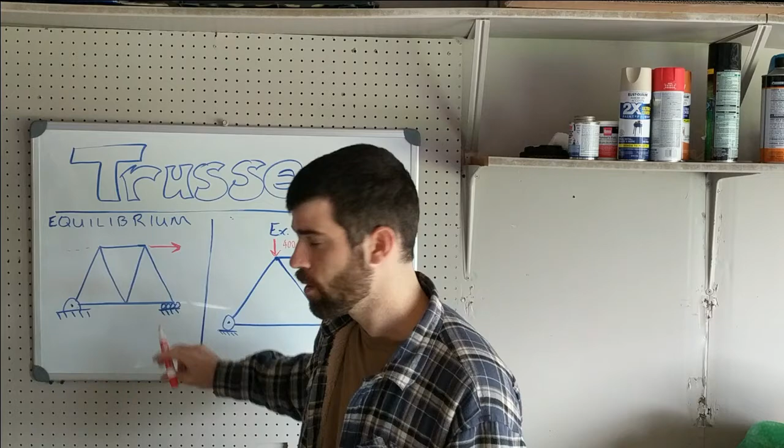And here at our little roller skate, we can only have support reactions vertically. So we know we're going to be able to solve for a little reaction here. And then we've introduced this vertical force that's going to have to get counteracted somewhere else. Well, where can we counteract it? Only right here. So we know that we're going to have this other vertical force at the pin joint.

Finally, there's this X component here - I mean, it's all X, this force. And that's going to have to get balanced out somewhere. So we're going to put that right here.

So in example 6.2, one of your solved ones worked out in the book, you see, even though they're not both on the ground like we'd normally have, we've got our pin joint that's going to have an X and a Y support component, probably, and then we've got our little egg-shaped roller that's going to have a vertical support component.

Okay, so now we've got dimensions. You've got 400 newtons acting 3 meters away trying to turn this counterclockwise. You've got 600 newtons acting 4 meters away trying to turn it counterclockwise. Those are working together, so we're going to need to work against that here at this support. So 400 times 3 is 1200. 600 times 4 is 2400. That's 3600. We've got to counteract it 6 meters away, so there's going to be 600 newtons acting up like this.

Okay, so now we have 600 newtons vertical, 400 newtons vertical the other way. What's left is 200 newtons this way. And then we've got 600 newtons this way. Nothing else happening in the X direction, so we know we're going to need 600 newtons here.

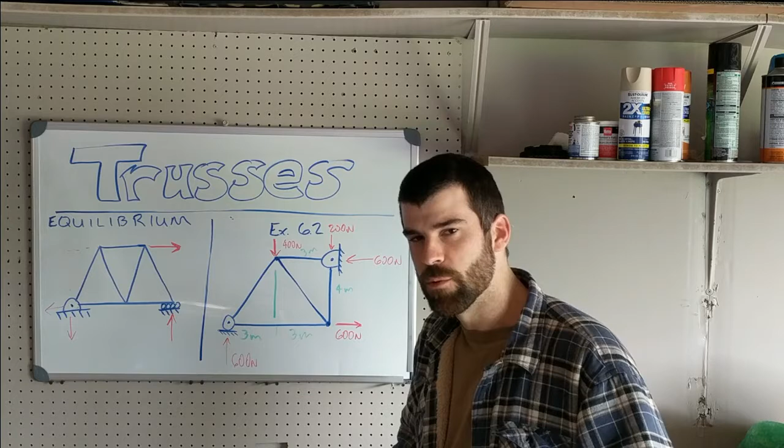So you can always find your support reactions before you go about solving. You don't always have to - we'll look at that in joint selection. But just know that with these truss problems, it's pretty much always going to look like this, where you have a pin with some kind of rotation, and then a little wheel.

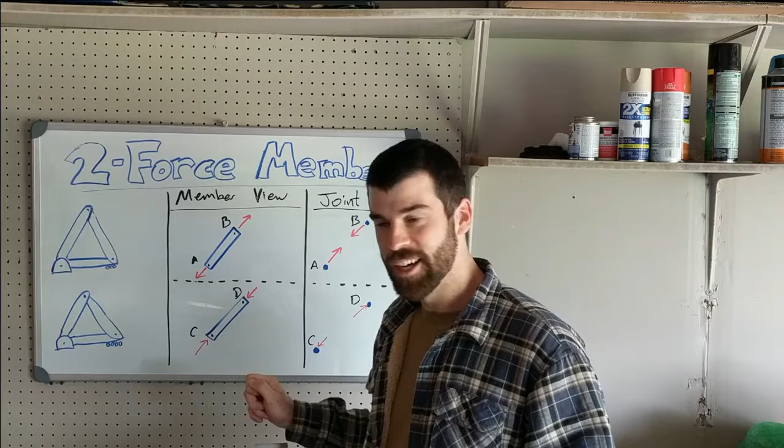Okay, so when we worry about trusses, we know they're always going to be two-force members. This makes our lives much simpler. What do we mean by a two-force member? Well, if you remember from last chapter, it's just going to be a member where you have only the force in the direction of the member. It's equal and opposite at both ends.

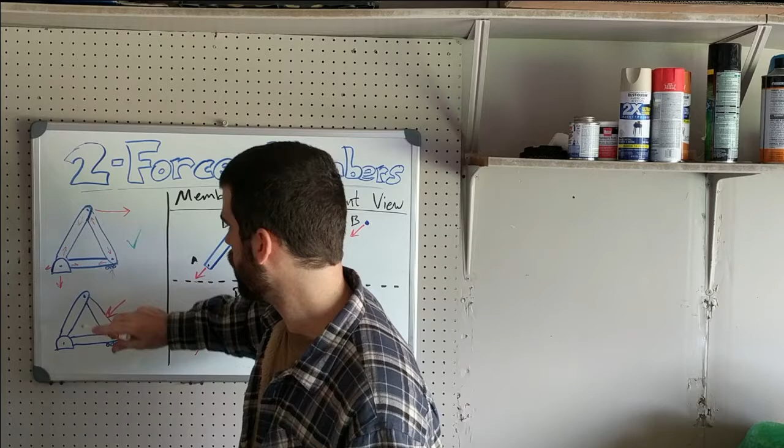Anyhow, what is not a two-force member is if we apply this load here in the middle. This is going to create some other kind of stuff that we're going to worry about when we get to frames. But this right here is not a two-force member because the load is not being applied to one of the joints. And this load doesn't have to be applied horizontally, we could have it be vertically, but it's got to be applied at the joint. So this is not a two-force member.

Okay, so these two-force members have two possibilities of what's going to happen in them, excluding zero force. I guess there's three. They could be in tension, they could be in compression, or they could be zero force.

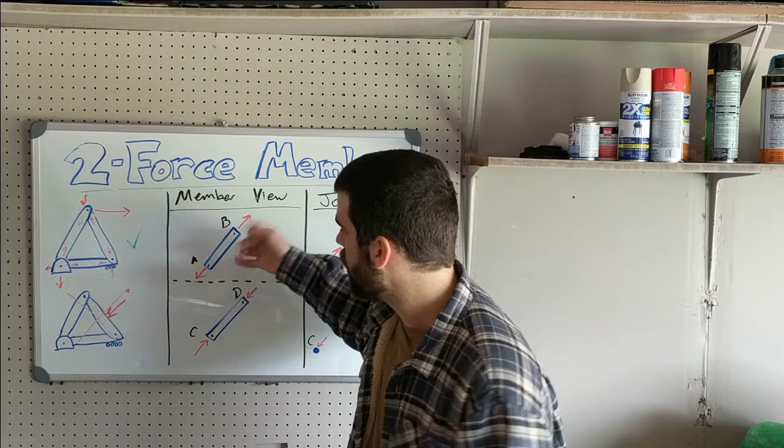So if a member is in tension, the bar is getting stretched out. And so from the member's view, tension is going to look like this. You've got these two forces, each pin is pulling it apart. But equivalently, so let's go.

Okay, so we have tension here. But if we look at the same thing from the joint's perspective, we're going to have the arrows facing the other way. That's Newton's third law, right? We've got each action has an equal and opposite reaction. So even though there's some confusion here sometimes, because you look at arrows like this, it looks like they're pointing in, and it looks like they're squeezing that bar, which makes you think compression sometimes. But don't ever think that. What's happening here is that the bar is pulling in, it's tugging in at each joint, and so this is also tension.

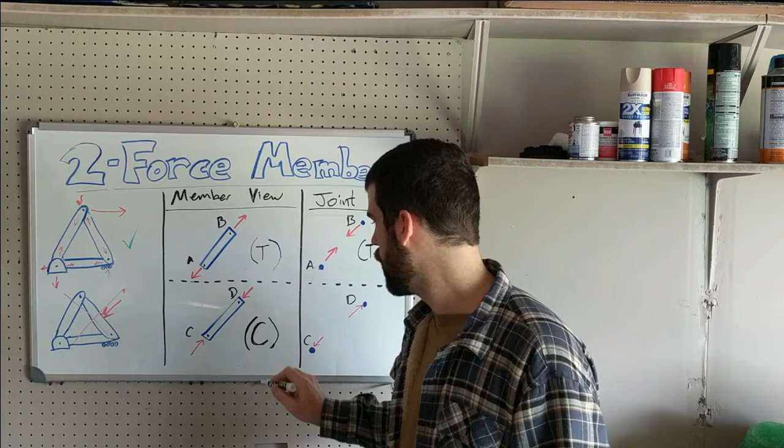Conversely, if I'm the bar, compression looks like it's squeezing in on me. So we write C for compression. It's terrible. And then if you look at it from the joint perspective, this is the bar pushing out on the joints, and so this is also compression. So just make sure that you're always aware when you're drawing free body diagrams and trying to analyze joints or members that you know which one you're looking at, which perspective you're looking from, because this will start to matter a whole lot when we get to free body diagrams of frames and machines and things like that.

Okay, like I was talking about previously, sometimes a two-force member is actually a zero-force member. So this happens in two different situations. One situation is when the two members connect at a joint that is subjected to no external loading. So one situation happens where you have a joint of just two of these two-force members, jointed at a pin joint, and it's subjected to no external forces or reaction forces. So it can't be at one of your roller skates or your pin joints.

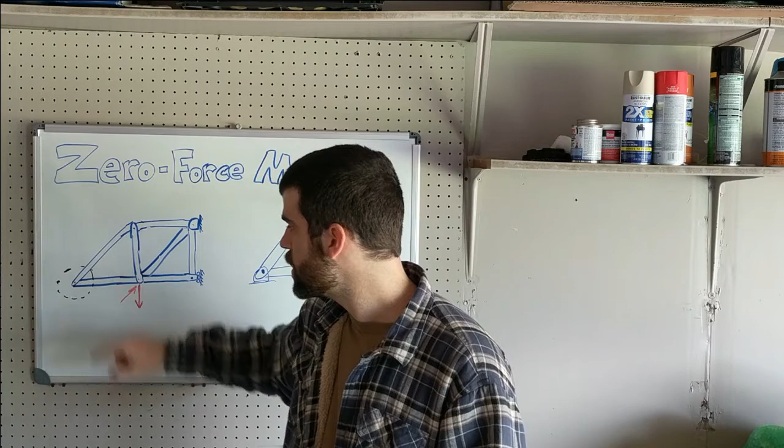It can't be acted on by an outside force. But you see that with this force happening here, this is being counteracted by these guys, and even if there's force being exerted kind of obliquely or whatever, this force is going to be compensated over here, because if there's no reaction force or external force happening over here, then there's really nothing that this joint could do to counteract some kind of a force developing in here. So this tells you that both of these are going to be zero force members, and that you can just basically forget about them when you're doing your problem.

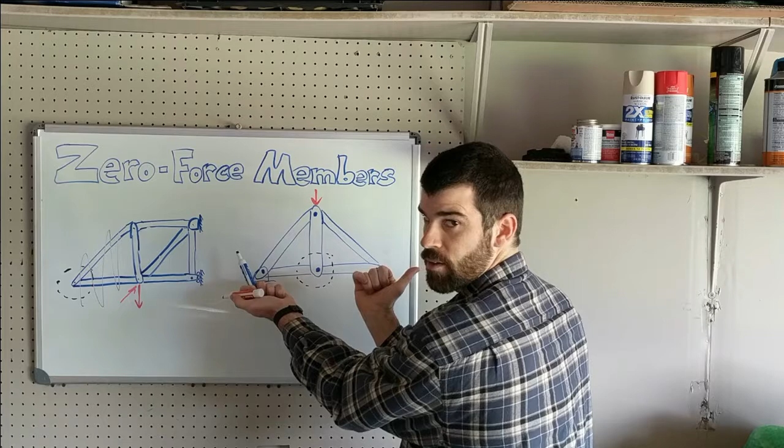Likewise, if you ever find a place where you have two members that are collinear, and then there's a third member joining that joint, then that third member is a prime candidate for a zero force member. This is confusing at first, because in this situation you have a force that appears to be applied directly into this middle member. However, if this member was to be counteracting this force, imagining these weren't there, it would have to be in compression to counteract that. So down here you'd need something to counteract that compression, and there's nothing here—no reaction, no external force. So all of the load from here is going into these guys, and subsequently these guys have equal and opposite reaction forces in this plane, leaving nothing for this member to do. So this is also going to be a zero force member.

Remember, however, if there's ever a load applied directly to it, all bets are off, and you have to analyze the forces in it now. This is now a load carrying member.

All right, method of joints. It's always nice to be able to find the zero force members before you solve, so that you don't end up overcomplicating things or trying to solve a harder problem than there actually is. In fact, in some cases they might make it so that you have to find these in order to solve the problem. But in this one, we're just worried about finding zero force members, and it's actually very easy to do.

So remember, we have two different ways to tell if there's a zero force member. The first one is that there will be only two members forming a truss joint, and there will be no external load or reaction support load on it.

So if we look at our diagram, there's E and A, both have two members forming truss joints. However, both of them are going to have support reaction forces. E is our little roller, A is our pin joint, and with external loads on the whole thing, we know that both of these are going to have some kind of external loads. So these are not going to have zero force members.

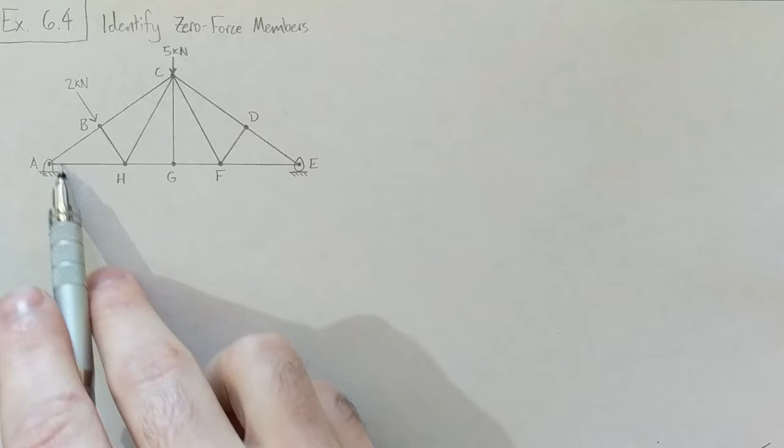The next way is where two of three members are collinear. Then the third is a zero force member if there's no external reaction force or external loading.

And so we have three places in this one figure where that is the case. We have joint D, where CD, DE are collinear, and DF is not, and we do not see any external loading on DF. So we know that DF is going to be a zero force member.

We also see this happening here at G, where HG, GF are collinear, GC is not. So GC is the one we're concerned about here, and there's no external load being applied at G.

Now this is one that'll confuse you—this force being directed straight into G here, and you just think there's no way that there's not some loading happening here. But then if you thought about this 5 kilonewton load running into this CG member here, then there would have to be something counteracting that in the Y direction, which we don't have. So we know that this segment GC, or CG—whatever, I'll call it GC—is going to be a zero force member as well.

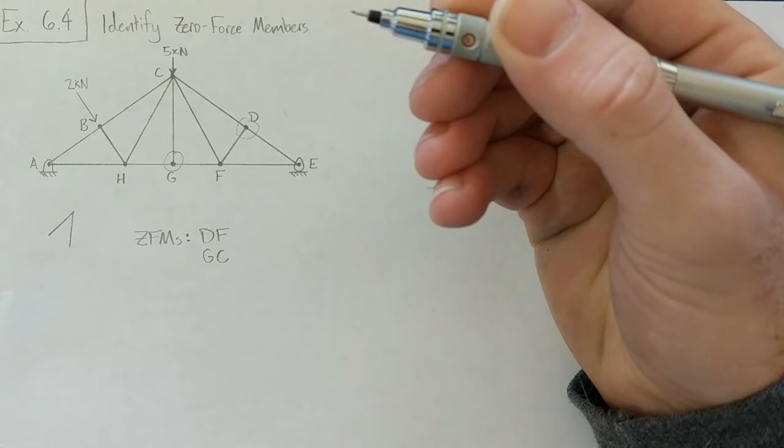Okay, so another obvious one is going to be B right here, where we have these two collinear and BH is not. However, you see that there is an external load being applied directly at B, so we know that BH is not a zero force member.

And now finally, the one that doesn't stand out quite as much, but still is the same, is right here at F. We have GF and FE are collinear. We already know that DF is a zero force member, and looking at FC here, this one's also going to have to be a zero force member. Similarly to G, we don't have anything being exerted at F. So even though we're not seeing this nice right angle setup like in our perfect examples, we still know that this is going to be a zero force member because we have no external loads being applied here at F. So CF is also going to be a zero force member.

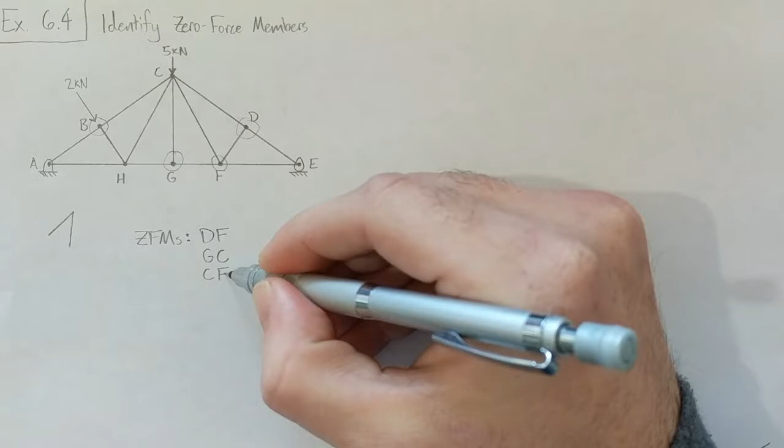And then these are the only three that we have. Looking here at F6-2, it just says which joint are you going to start with. So the order they prescribe is to first look for zero force members. Let's write it down as we go along: ZFM. So we only have one situation where you have a two-member joint, and that one does have an external load applied to it, so neither of these is going to be a zero force member.

And then we have one situation where we have two collinear members here, meaning that the third one is a candidate for being a zero force member. So what we do is we look at the joint C where the three meet, and we say, is there any support reaction or external load being applied at joint C? And there's not. Remember it doesn't matter that there's going to be a reaction force at A, we're interested in C here. And it tells us that because there's no external load here and these guys are collinear, then CA is going to be a zero force member.

So now we want to look and see about our knowns and unknowns in this problem. You might be tempted to jump right away into figuring out the support reactions at A and B, which is totally fine to do, and you'll probably end up wanting those if you're going to be solving for every member in the problem. But we don't actually have to in this situation, because if we look at D right here, we see that we have our one known, this 300-pound force being applied in the negative y direction, and then we have our two unknowns in DA and DC. So this is actually a valid place for us to start.

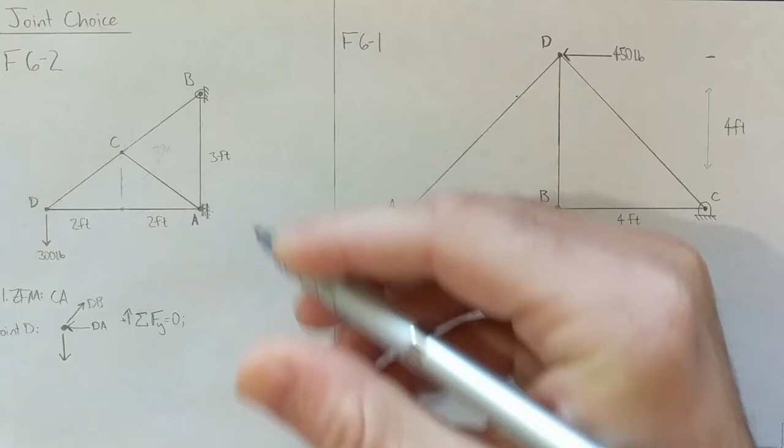So if we want to start solving here, we can look at the summation in the y direction equals 0. We know that this guy up here is going to be 5 feet, because it is a 3, 4, 5 triangle. So what we can do: 3/5 of FDC is 300 pounds, which means that FDC is 500 pounds, and that is going to be in tension, as we discussed.

And knowing that, we can use our summation in the x direction equals 0, and that's going to say that 4/5 of FDC minus FDA is going to equal 0. So we get that FDA is going to be 400 pounds, and that one is in compression, as we discussed. From there, the rest of the problem is the same stuff going at the joints.

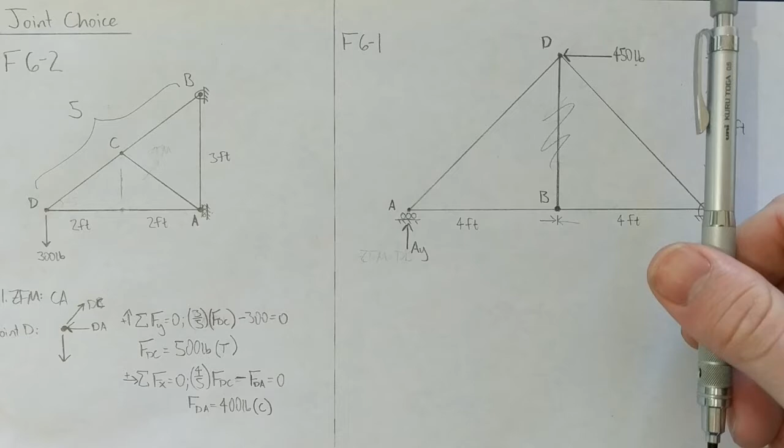Looking at support reactions now, we see that this 450 pound force is sort of tending to rotate this whole thing about C, right? And so that means that we're going to have a reaction force here called AY. And if we've got that, then that means we're going to have a reaction force down here called CY.

If we've got this guy here, it needs to be balanced out by this guy here, that's going to be CX. So we have a few choices here, but I think A is going to be the easiest to start at, because we'll know this AY in a sec, and then this AB is in the X direction, so we'll be able to directly solve for AD very easily.

First we have to find our support reaction, so this whole thing is tending this way, so we're going to balance out the moment about C. Summing in the counterclockwise direction, our moment about C is 0, and we have counterclockwise 450 pounds applied at 4 feet.

So we've got 450 times 4 feet plus AY times 8 feet—sorry, it's going to be minus AY times 8 feet—should equal 0. That gets us AY equal to 225 pounds.

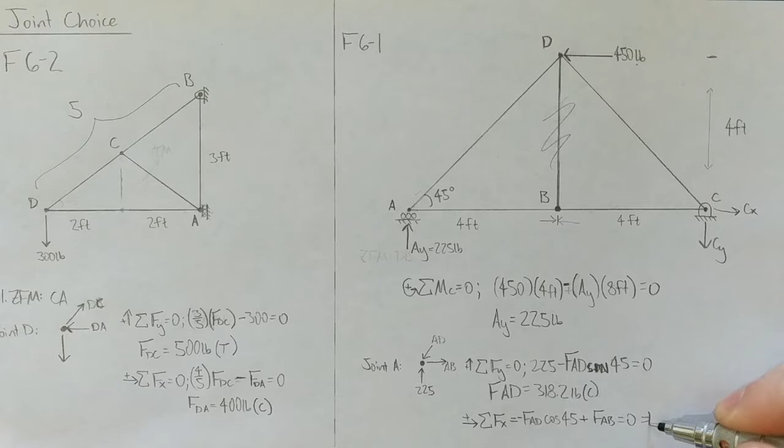Then in the x direction, we get FAD cosine 45, which turns out to be 225, minus because it's going that way, plus FAB, which is already in the x direction, equals 0. What we get from that is FAB equals 225 pounds in tension.

That's how we'd start this problem off. So we've got this compressive load here, meaning we've got that same kind of deal going on there. We know our tension here equals our tension here, equals our tension here, equals our tension here. CY has to get balanced out by CD. If you do that summation just like we did down here, you'll get that FCD equals 318.2 pounds, and it's in tension instead of the compression we saw in FAD.

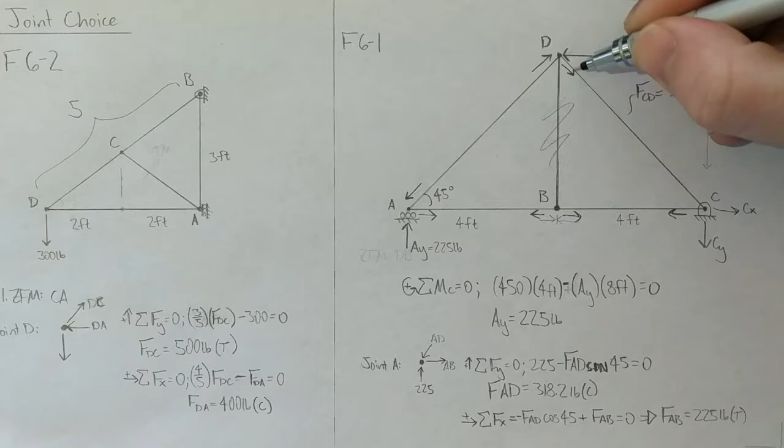Example 6-1, just about the easiest. My neighbor has a chicken—don't mind the chicken. I'm doing this out in my garage.

We have this very simple truss, 45, 45, 90, with a 500 Newton load being applied at joint B up here. Let's get to solving. First off, we look for any zero force members. Though these are all joints of only 2 members, this one has an external load, and these two have support reactions, so there won't be any zero force members.

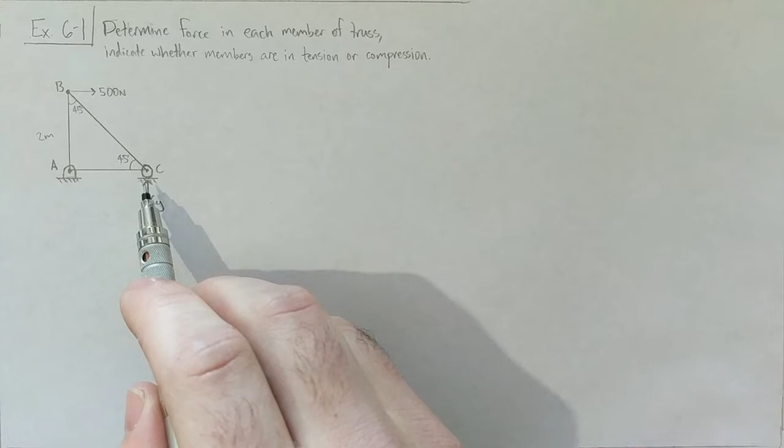So then we can go ahead and draw our free body diagram. We see that this 500 newtons at B is going to create a moment about A, so we'll need to counteract that moment here at C with CY, and that vertical load CY will have to be counteracted at A, giving us our AY. Finally, 500 newtons in the positive x direction needs to be counteracted by 500 newtons in the negative x direction, which we'll call AX.

So there's our free body diagram. I know I drew it over the original diagram, but I spent time with a ruler to make that, so I figure we'll use it.

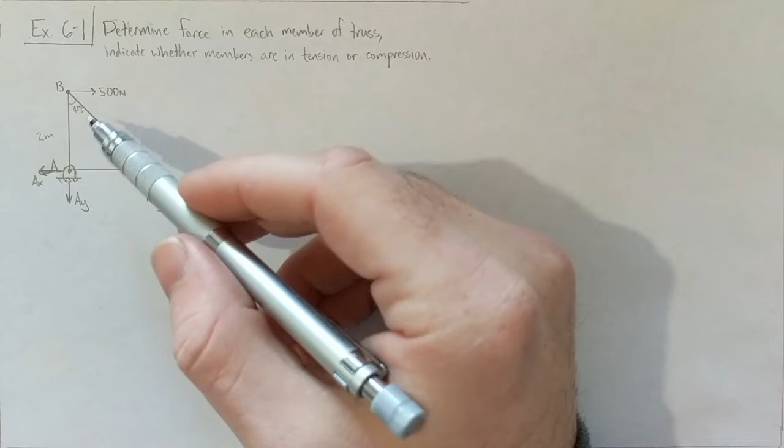All right, so now we want to get to solving, and we look at what we've got going on in the different joints, and we see that if we did go ahead and calculate AX, AY, and CY, then we could start really wherever we wanted. But let's go ahead and skip that, because we can see that at B we already have 1 known and 2 unknowns.

So we can just go ahead and get to solving. Let's draw joint B. We have 500 newtons being in the positive x direction. And then we can tell, because we only have one member of the three, one force here that would be able to counteract that x direction is going to be this BC member, because there's no x component to BA here. There's no x component, so we know that BC is going to be in this direction.

And that indicates compression. However, because it becomes very useful later on in more difficult problems to make assumptions and then see when the answer comes out whether it's positive or negative to support or deny or refute that assumption, we're going to go ahead and assume that this one is in tension. We're going to assume this is also in tension. And then just watch what happens here.

So this is our FBC, and this is our FBA. All right, so let's sum about joint B in the x direction. So we have 500 newtons, adding, because we're assuming this is in tension, so its x direction is that way. So we're adding this FBC times the cosine of 45, and that's going to equal 0.

Okay, and so when we do this, we get FBC equals negative 707.1 newtons. So because we assumed it was in tension and then we ended up with a negative for the answer, that means that we're going to reverse this, and we'll say, sorry, too many arrows, it might be confusing, we're going to say this is 707.1 newtons in compression.

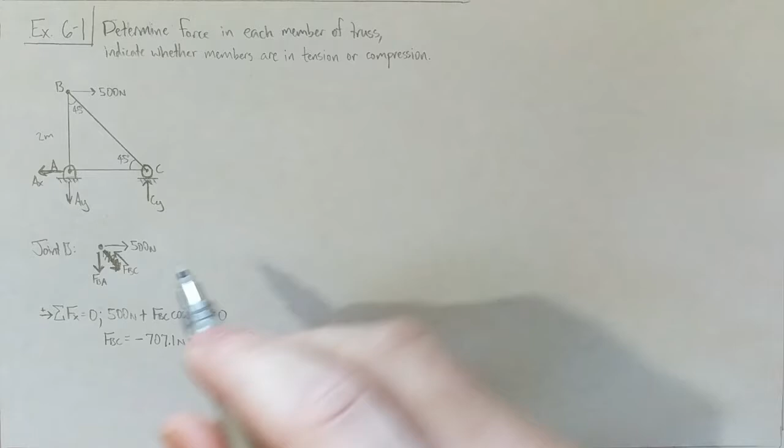Okay, and so now that we know that one's in compression, that does confirm that our FBA is going to be in tension, because the Y component of FBC is going to be in the vertical direction, the positive Y direction, meaning that the FBA is going to have to be in the negative Y direction. So let's go ahead and do that.

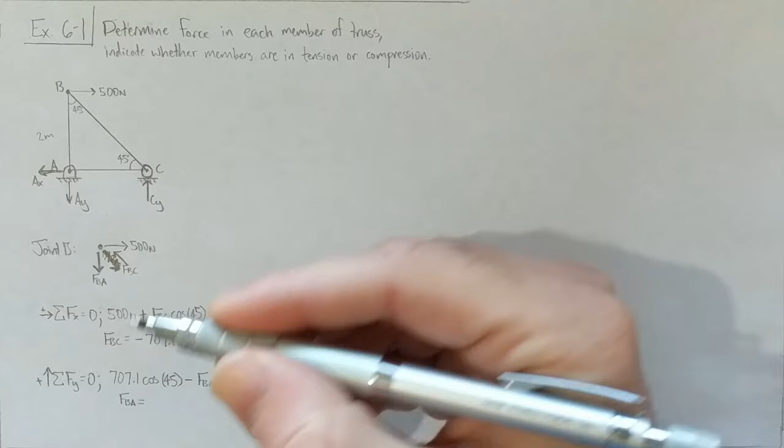Summing the positive FY, we get 707.1 times the cosine. I guess here, if you were looking at that 45, then it would have made more sense to use sine of 45, but again, since we're using 45 degrees here, it does not matter if we're using cosine or sine. So 707.1 cosine 45 minus that FBA equals 0. And what we get is that FBA is going to equal 500 newtons.

And that is in tension. All right, moving along. Let's go ahead and look at joint C now, because we know what this is, and so we've got, at this point, two knowns and... well, okay, so we don't know CY yet because we decided to skip the support reaction thing. But watch how easy this is going to be.

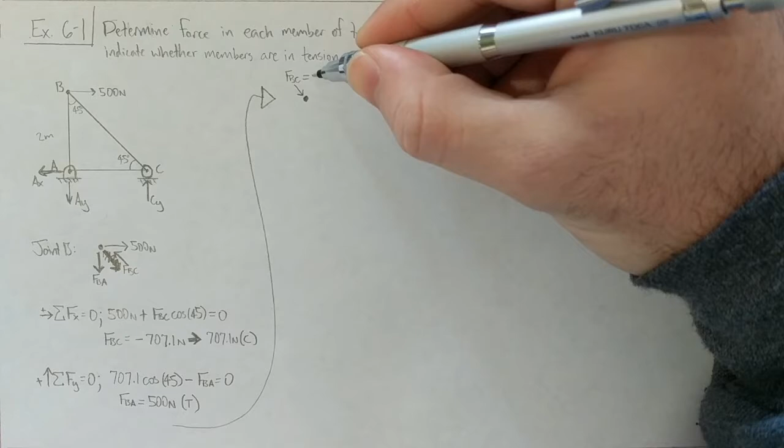So at joint C, we have FBC, which is 707.1, and we have CY. And so based on the direction of FBC here, we see that FCA is going to have to be in tension.

Exact same thing happens for summation at X. We get that 707.1, we'll say cosine this time, 45, minus FCA, it's going to equal 0. And then we get that FCA equals 500 newtons. And that will also be in tension.

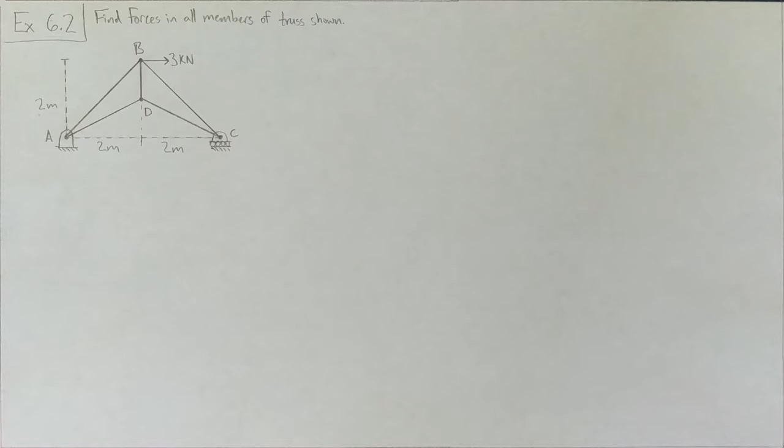Okay. So, all right, example 6.2. This is a pretty good one for practice, I think, because you've got to do some concurrent solving and whatnot. And it's also just kind of a funky looking truss, not quite as easy to figure out what to do right off the bat. But anyway, we're going to do that.

So looking at it, we don't see any zero force members, and we also see that we are going to need to find the support reactions before we get on to solving any further. So we see that that 3 kilonewton load is going to be causing a moment about A, that the roller joint, support roller—what do they call this—little roller skate on C is going to be counteracting with a moment, I mean a force that looks like this, that will be giving the moment that counteracts this moment.

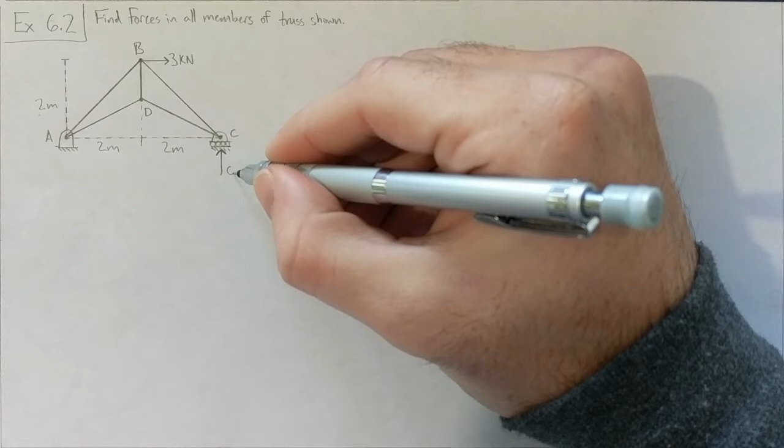So that's going to be CY. And in order to oppose CY, we're going to need an AY like that. And to oppose the 3 kilonewtons, we're going to need an AX like that. Okay, so let's figure out what those support reactions are equal to.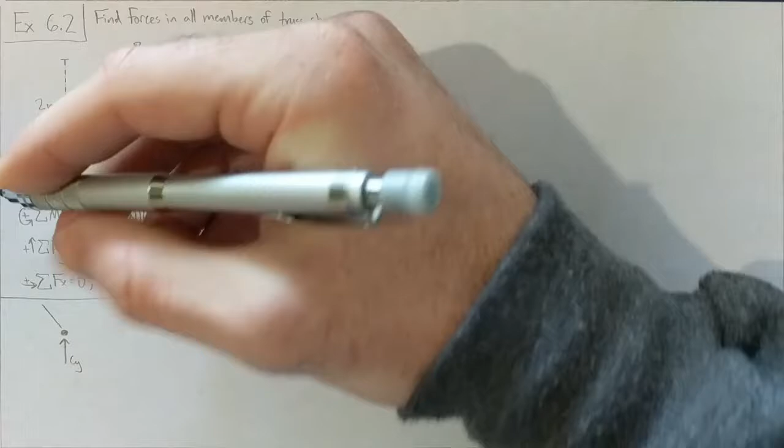So what we have at joint C is this CY, and we've got FBC coming in at 45 degrees. This is FBC. We're just going to go ahead and draw them in tension for now, making that assumption like the book says to do. And here's CD, FCD.

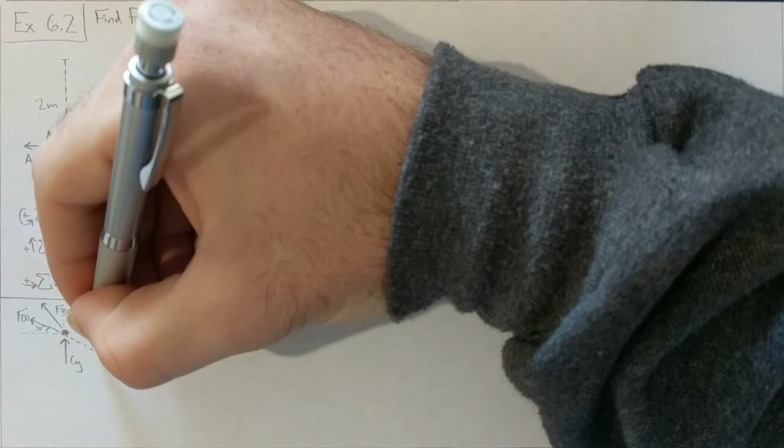Our original x-axis looked like this, where FCD was off it by 30 degrees and FBC was off it by 45. So if this was 30 degrees, we're going to make FCD our new x-axis. So this was x, now this is going to be x prime, and perpendicular to x prime, we have y prime.

All right, so now we have to make sure we understand the components of each of these things in our new x prime, y prime configuration. FCD is directed along the x prime axis. FBC, the angle between CD and BC, is 15 degrees. And between CY and BC, this is that 30 degrees that we shifted everything.

So the reason we moved into this new coordinate system is so that FCD disappears when we sum about the y prime axis. Let's go ahead and do that. Summation about y prime is going to equal 0.

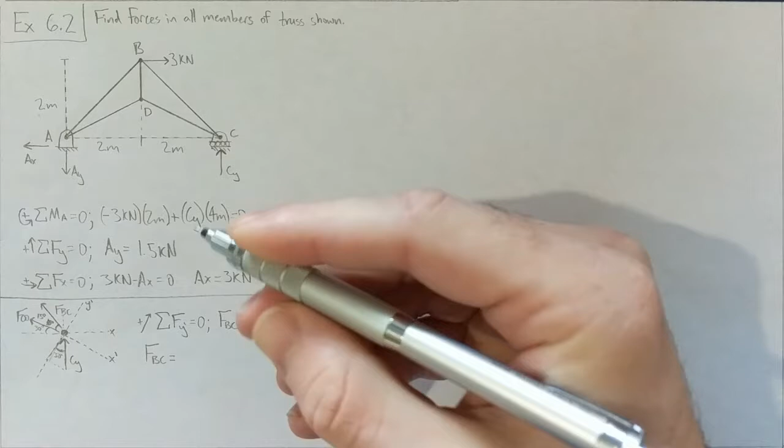We know CY equals 1.5 kilonewtons. And so what that gets us is that FBC equals negative 5.02 kilonewtons. Because we got that negative and we were assuming it's in tension, that means FBC is positive 5.02 kilonewtons in compression.

And then now we can do the summation of the x-axis, so the x prime axis, I should say.

And you know, this is where it's kind of nice to do your little arrows before your summation symbols, just to remind yourself what's going on.

Sum of f x prime is going to be minus FCD plus the sine component of this, which is going to be cy sine 30, which equals 0. cy was 1.5k again. And that gets us that FCD is equal to 4.1 kilonewtons.

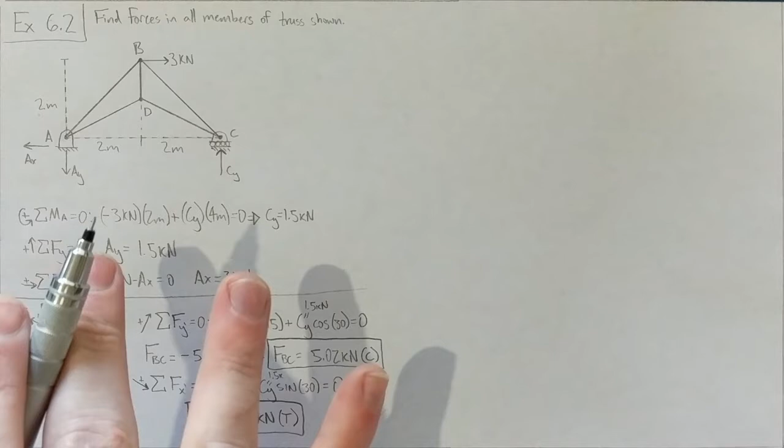Okay, so we did this change of coordinates in order to be able to solve directly instead of solving equations simultaneously. It's not too hard to solve a simultaneous system of two equations, but I'm going to use this opportunity to demonstrate doing that with one of your trusty TI calculators, because I think this is something that's going to be very beneficial to those of you that don't already do this. I think you can save a lot of time on tests where you can just enter in the equations and get your answers instead of having to think at all about how you want to do your elimination or substitution. So even though this is probably a pretty trivial example, I think it's a good skill. So you can skip ahead if you're not interested in this part.

But basically, a system of equations, when you write it in, well, let's develop our equations first real quick. All right, so we are just using the regular x and y axes this time, not the changed coordinates that we did last time.

Okay, so whenever we solve a system of equations as a matrix, a linear system of equations, I should say, we set these things up as Ax equals b, and then the solution can be calculated if you just do A inverse times b equals x.

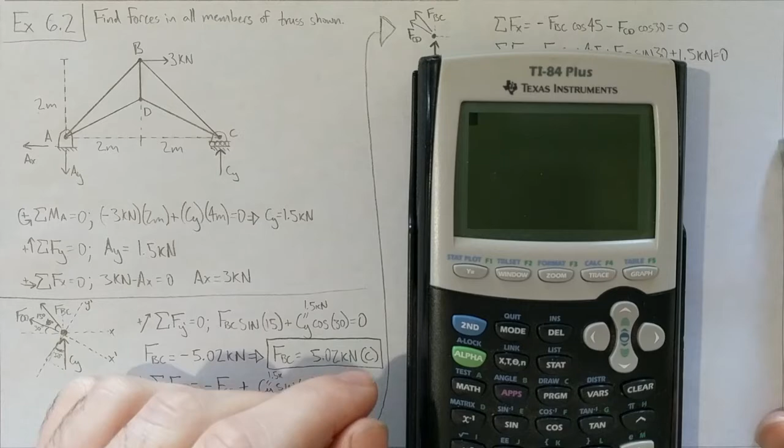So, getting at your trusty TI-84 Plus, oh man, living large here. We go second, matrix, edit, it's a 2 by 2, right on. Get minus cosine 45, minus cosine 30. We've got sine of 45, and we've got sine of 30. Right on. Okay, now we're going to edit this one, and we got 0. This is our b. 0 and minus 1.5. Well, let's just go ahead and write 1500. No, let's keep it in kilo.

All right, cool. So now what we do is we just go matrix A, okay? What we're doing right now is this, by the way: A inverse B. Look at that. So, move that there. So our A inverse times B equals X, which equals minus...

Minus 5.02 and 4.1. Okay. And this was X, which is equivalent to our FBC and our FCD.

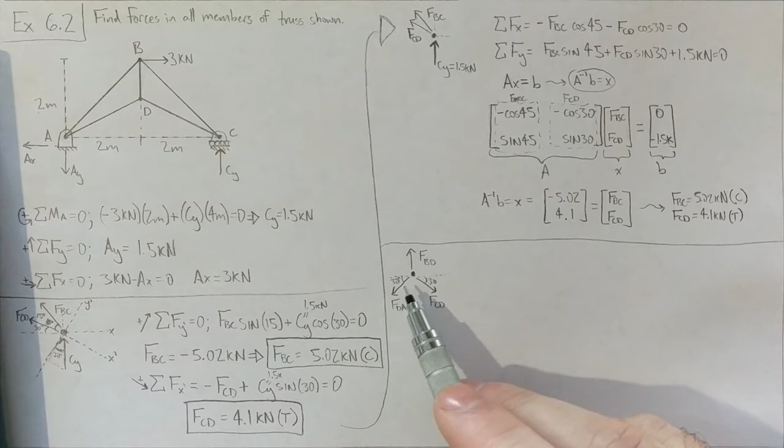Now let's take a look at joint D. All right, so you can see I've already drawn the directions of all of them. And that's because this particular joint, you can actually be a little clever with this one. So for FDA and FCD, it's pretty apparent that they're going to have to be their X components. They're symmetrical about the y-axis, so they're just going to be equal and opposite.

But what you can realize about this whole thing is that you've got 120 degrees between every single pair of these. So we can see by the radial symmetry here how these are all going to have to be the same tensile force. So FDA is equal to FBD is equal to FCD.

And those are all equal to 4.1 kilonewtons in compression... in tension. We can turn that into a T, can't we? Kind of looks a little towy. All right, that's good.

Okay, and then we'll get one more before we go, which is to figure out what this force AB is going to be. We'll go ahead and take a look at, it doesn't matter if we do it at A or at B. Let's just look at A because we've only got, well, let's look at B. Let's look at B, I like that. All right, so let's see. We'll just assume tension like we normally do when we're assuming.

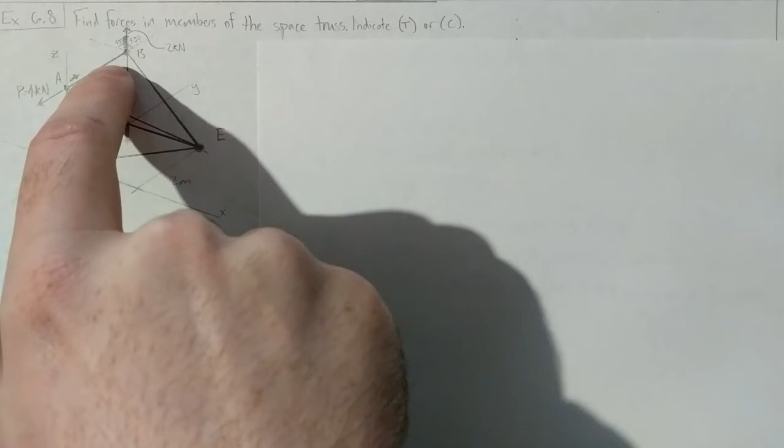I went ahead and already got the unit vectors for AE, BE, and CE because those are the only ones that aren't simply along one of the coordinate axes that's already defined. So like CD, that's just going to be multiplied by the J unit vector, and AC is just multiplied by the K unit vector, whereas these are going to have to be multiplied by a few because they're Cartesian vectors now because we're in 3D.

All right, so we're going to start at A - and forget about that little arrow there. We're going to start at A because we have 1 known and 3 unknowns. And in 3D space trusses here, we can do that. So we're just going to write out the vector notation for each of these unknown forces. So FAB is FAB in the J direction. FAC is FAC in the K direction. FAE is FAE in this 0.577 yada yada direction. And then P is this minus 4 kilonewtons in the J direction.

Okay, so we're just going to go ahead and sum up forces equal to zero. It will kind of end up making a system, but the way this problem is set up, and the way that space truss problems are generally going to be set up, it'll just kind of reveal things as it goes along.

Fx is going to be this 0.577 that you get for this FAE I component, and nothing else. So that tells us that the entire vector FAE is going to be equal to 0, because it's saying the whole FAE times 0.577 is equal to 0. So we know that FAE, this long guy, is going to be a zero force member. I'll actually box that.

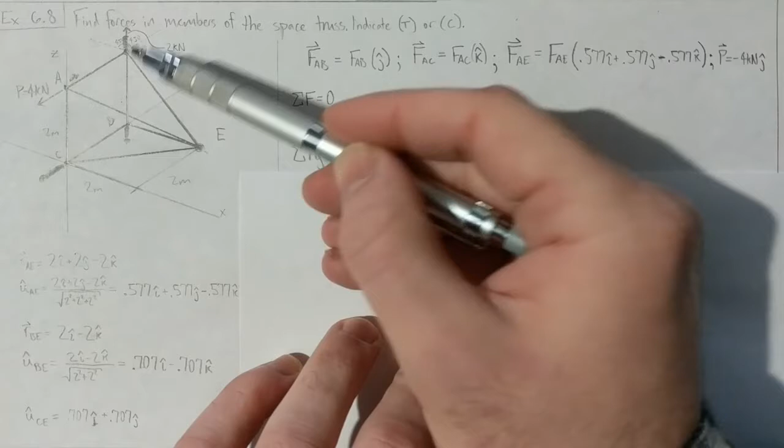And so it's 4 kilonewtons in the positive J direction, but unlike we were doing in previous units, we're not just going to say positive 4 kilonewtons, we have to say it's 4 kilonewtons in tension, because when we get over to B, that's going to be in the negative j direction. So don't get confused based on what we've done in previous units.

You still have to consider each of these as a two-force member, and each of them is going to have either tension or compression, which will be positive for one end and negative for the other end.

All right, and then for FZ, we have FAC minus the Z component of FAE. We still have FAE equal to 0, so our FAC is also going to be 0. So this is a zero force member here, this is a zero force member here.

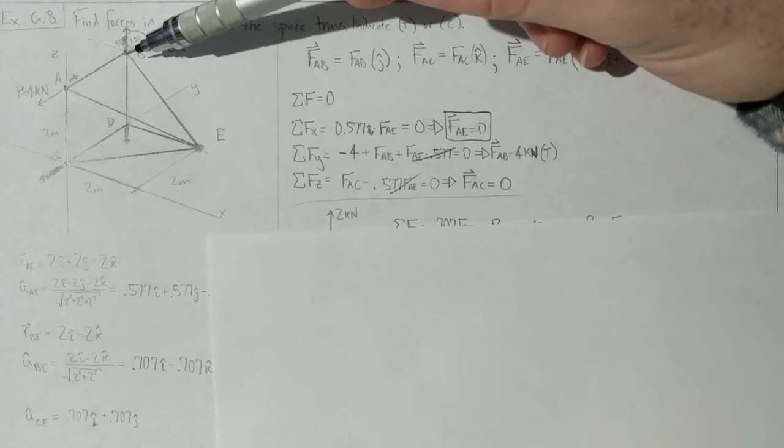All right, so now we can move along. Let's go ahead and take a look at what's going on with B. So we have that 2 kilonewton in the positive Z direction. We have our known force AB, and then we have unknowns for BE, BD, and the support reaction, which we're going to call RB. Okay, so here's a drawing of it, kind of crude, but this is RB back here, BE, BD, 4K, and 2K.

So I'm just assuming here that the BD force is going to be in tension, just like we've done when we don't know for sure. Looks like it might be. Same with FBE. So we're just going to roll with that and see what happens.

All right, so we have this 0.707 FBE minus our RB cosine 45 is 0. So we know that RB and FBE are going to be the same magnitude.

We have FY, some more going on. So we have our RB in there, sine 45, and then we have 4 kilonewtons from our FAB that we know. So that helps us figure out what RB is, which is 5.66 kilonewtons, and we learned from here that that was going to be equal to FBE. So signs came out positive, sorry about that. 5.66 is kind of ugly, but we get that FBE is 5.66 kilonewtons in tension.

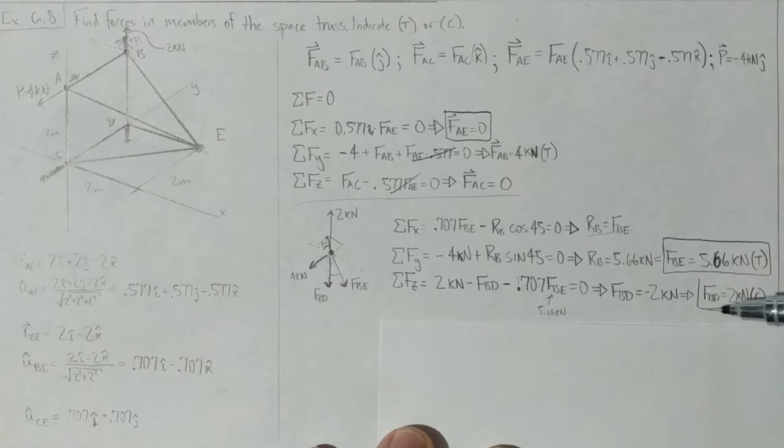And so that told us that our assumption about tension was incorrect. So we're going to write FBD is equal to 2 kilonewtons in compression. All right, so now we're back to where I left off last time. We can keep on chugging.

And let's take a look at joint D. So we have BD, which is in the vertical direction, and we know that it's 2 kilonewtons, and we also know that we have this directional support here that can only support in that positive Z direction. So we know that BD is just going to be reacted by this. CD has nothing that it's going to react with, so CD looks to be a zero force member.

Here, I'll just write sum of forces. So CD, recall we had some other zero force members as well. We had, sorry, this is FCD, okay, zero force member. We had FAE, also a zero force member. FAC was also a zero force member.

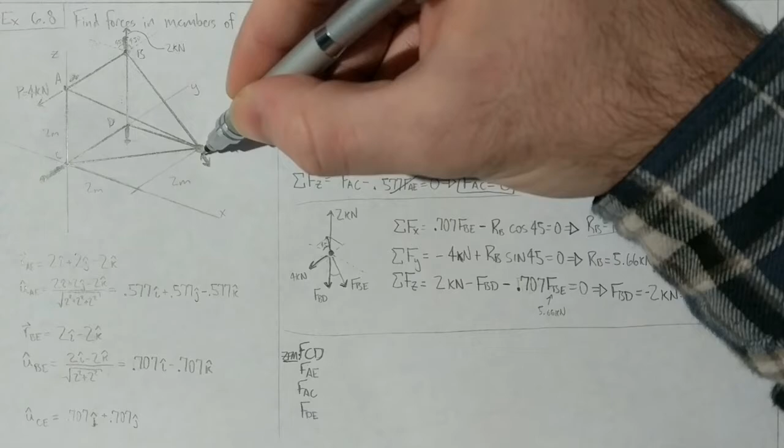So this is where it gets a little tricky, you start to think, okay, FBE actually had tension going on in it. So you're thinking DE should have to have some tension, but since E is that welded joint, E can have a support reaction that's counteracting that tension, and then the rest of these three can be zero force members, and they are.

So yeah, finally FCE, we had this was a zero force, this was a zero force, and there's nothing different about this. It's another zero force member.

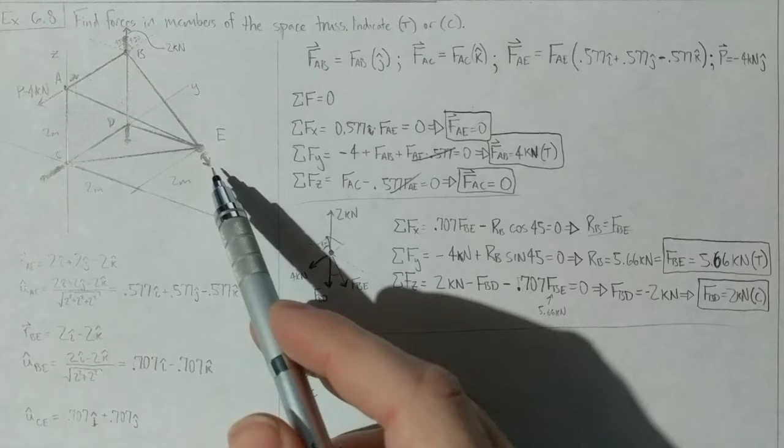And so you're done, and it turns out that the only three members that carried any of the tension in this problem were FAB, FBE, and FDB.

Okay, so in the method of sections, what we want to do is solve for less than all of the different components, which in a small situation like this, if you were building a footbridge for the park or even a train bridge with only a few members, doesn't make a whole lot of sense, but in engineering sometimes we deal with much bigger, more complicated problems, and it helps to separate them out into little blocks.

You see this in circuits when people have an equivalent resistance, so that some team can work on one block of things and just pass on the input and output to the next team, and they can learn stuff. So maybe you want the person who has to source the material for the bolts to get the kind of information they need. You might just section off some part of the project or something. I don't know, it's enough justification.

In this class, what they're going to do is ask for a few different members of a bigger truss that are all arranged in a way that makes you think, oh, I should maybe just cut this and use the method of sections. And that's what we're going to do here.

So we want FGE, FGC, and FBC of this truss, for which we've already found some support reactions. We didn't find this support reaction, but we don't even need to, because we're going to cut it off here, and we're going to just look at this left side.

So that's what we have down here. And so these dotted lines are the other side of our cut for the three different unknown forces that we want to try and figure out. So what you end up doing in the method of sections is leveraging usually moment, by finding places like C and G here where two of your unknowns intersect an axis of rotation so that you can solve for whatever the third one is.

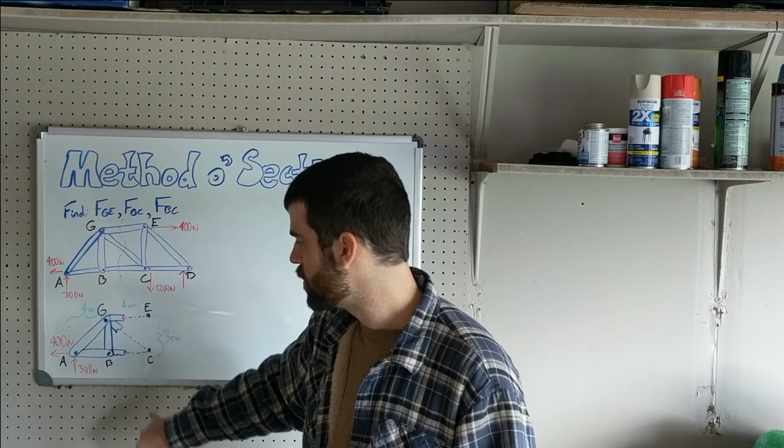So let's look at the moment about G. We'll sum counterclockwise per usual, so it's going to equal 0. That's going to be, we have a clockwise moment from both of the reaction forces, so it's going to be minus 400 times 3, minus 300 times 4, plus our BC. We're adding it because we know it's going to have to go counterclockwise to counteract these support reactions. So that's BC times our 3.

FBC times 3 equals 0, and what we get is that FBC is 800 newtons. And like we were saying, BC is going to cause a counterclockwise moment, so it's going to be directed like so, which is tension. It's 800 newtons in tension.

Okay, so now we can do the same exact thing here at joint C, where GC and BC are going to be eliminated, and so we'll be able to solve for GE.

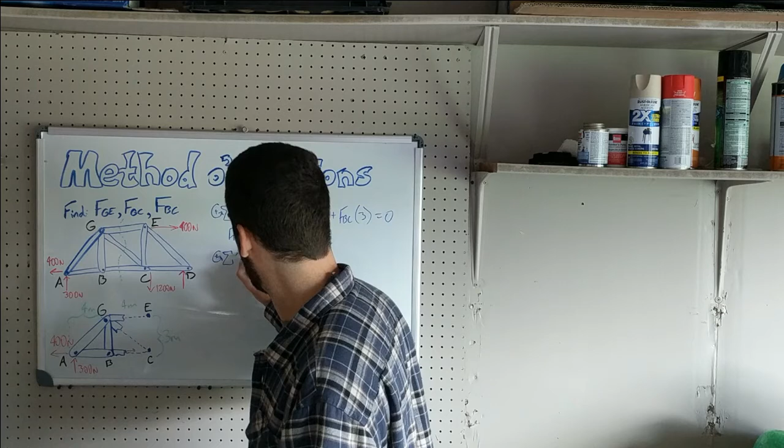Okay, and so we have our 400 Newton force goes through the line of action, through the axis, the point, so that's not going to contribute. So all we have is this 300 newtons, that's 4 plus 4 meters away from C. So we have, and that's also going to be counterclockwise, so this is going to be minus 300 times 8.

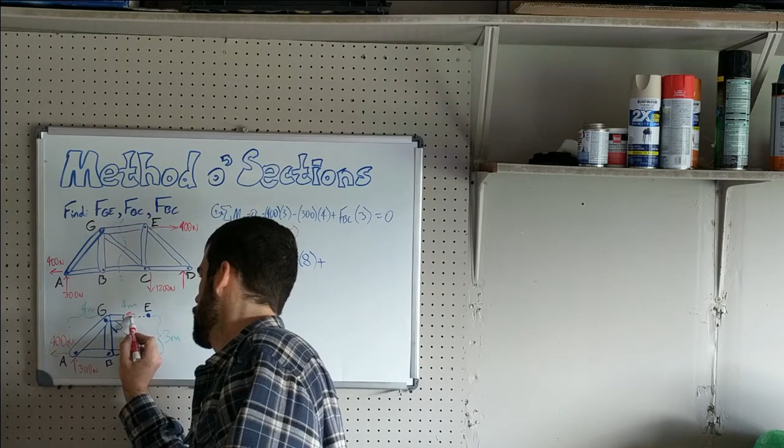Plus our GE, which is going to be causing a counterclockwise rotation, so it's going to be directed that way. Go ahead and draw our arrow for it. Yeah, so that looks like compression to me.

So that's plus FGE times 3 equals 0. So FGE is 2400 over 3, also 800. FGE equals 800 newtons in compression this time.

Alright, so FGE, since it has components in both the horizontal and vertical directions, we could sum it in the X or the Y if we wanted. Let's go ahead and use the Y, so summing in the Y.

0, and all we have is 300 newtons minus, this is a 3, 4, 5 triangle, and we want the 3 leg of it, so 3/5 times FGC equals 0, so FGC is 500 newtons.

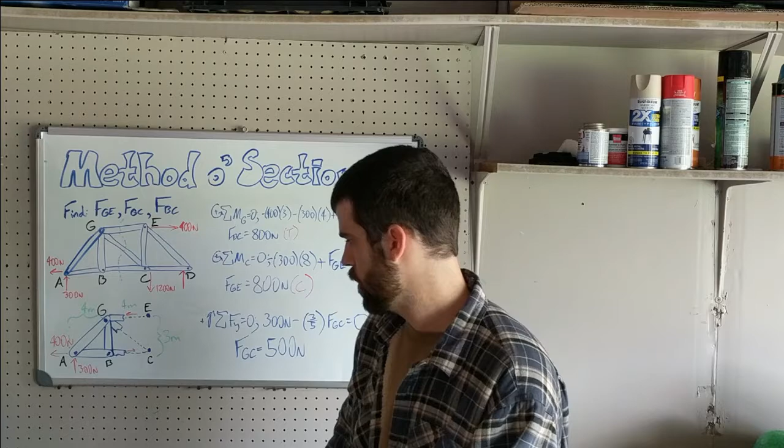And because it has to counteract this positive vertical force with a negative one, we know that that's going to be facing this way, which looks like tension. And that's the method of sections.

Alright, so here's a method of sections problem that's a little bit more complicated than some of the other ones. But it's a good example of a way that you can be clever and do a lot less work than it seems like the problem entails from the question. So the question we're asked is to find FCF. So that's all we want to get, is only this force right in here.

And so knowing what we normally do with our method of sections, we're going to want to cut along here and then use the section that has fewer forces going on. But first, before we can section that off, we're going to need to solve for whatever unknowns for the reaction force here. So all we need to do then is to sum the moment about A to get that reaction force, because the other reaction forces are going to happen at A, and we don't care about A because we're going to take this right side of the problem. So all we got to do is sum the moment about A.

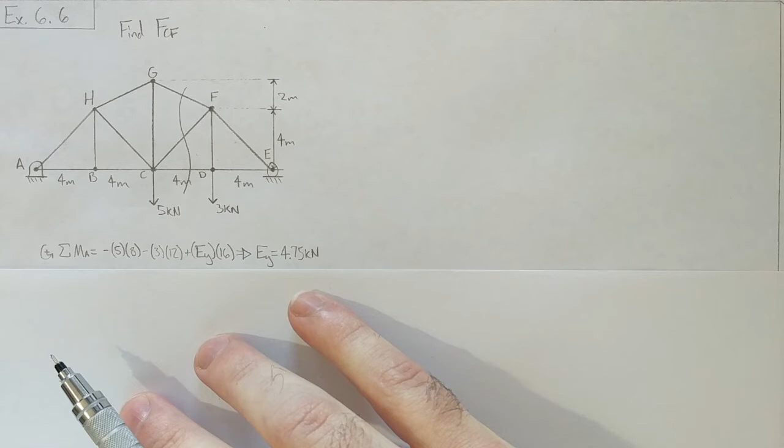We've got our minus 5 kilonewtons, that's 8 meters away. We've got our minus 3 kilonewtons, that's 12 meters away, plus our reaction force EY, that's 16 meters away. That comes out to being a positive vertical force of EY equals 4.75 kilonewtons.

Okay, so now we'll section it off. We'll make our cut. And so you can see we have just this 4.75 kilonewtons, this 3 kilonewtons, and then we've got our 3 components. This is the one we're interested in right here, CF.

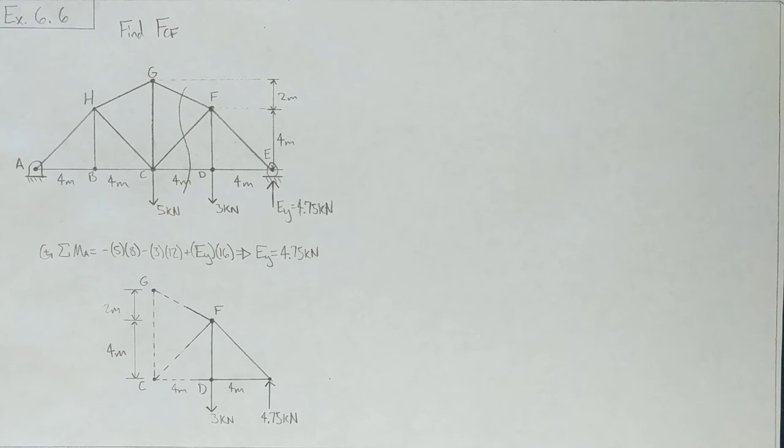And so normally what we would want to do here when we have our little square trusses is that we look for the places where, like C, right, we'd be able to get GF here because CF and CD both intersect here. So if we summed our moment about C, then we could try to do our GF thing. But we can actually go straight to CF, even though it doesn't look quite as obvious here, by extending out this line GF and finding where it intersects with CD, and then summing the moment about wherever that point ends up being.

We're given enough geometry to figure that out, because we see that this up here is a little 2 by 4 triangle, right? And so in order to get another 4 meters down, we're going to have to go down another 2, over another 4, down another 2. So we go down 2, over 4, down 2, over 4, down 2, and over 4 more. And this is going to be point... let's just call it N. It's a new point. No, let's not call it N, that means newtons. Fine, we'll call it O like the book.

Okay, so I'm just going to go ahead and draw that so that it's easier to visualize. Okay, so you see now we've got this big line of action for GO, or this big intersection of CD going all the way through to O, and GF going all the way through to O.

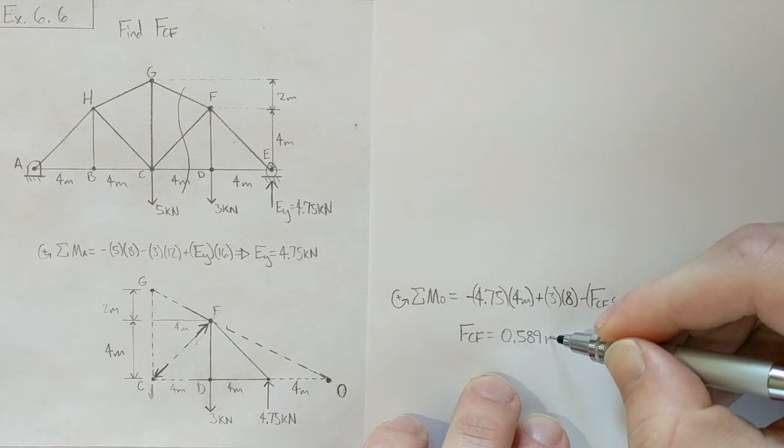So FCF, sine 45, applied 12 meters away, and that's going to equal 0. And what we get is that FCF equals 0.589 kilonewtons, and that's compressive, and we're done with the problem.

So this is a great example of how method of sections is really useful to do a lot less work. If you're in a crunch for time on a test and you're able to be clever about the way that you section it off, and this moment summing and moving CF down to here, you realize that you can boil it down to basically just two little equations instead of 12 or something.

Alright, so finally we're looking at frames and machines, and this is kind of going to be bringing in stuff that we've done in the previous chapters and sort of meshing it with the things that we've learned about trusses so far. So really the name of the game when it comes to frames and machines is free body diagrams, and then more free body diagrams, and then after that you would do some free body diagrams.

So what happens in a lot of cases, and we'll see this in some of the problems we're going to work on, the ping pong table, you'll need to analyze different parts of a problem from different members' perspectives. Say like you have pulleys on a bar, you might want to look at the bar, you might want to look at the pulleys, and always keeping in mind Newton's third law, that there's these equal and opposite reactions, and that's going to help you get through it.

Second point, example 6.9 is awful. I hate it, don't do it. Maybe look at it a little bit and see why maybe I hate it, but I think that the directions of the support reactions in it are just more confusing than anything else, and if they wanted to give an example like that, they should have put some numbers in it so that it would make a little bit more sense why the different ones are faced that way. Maybe I'll make like a 6.9 vengeance video or something, but I've got a different example similar to that I think would be a much more illuminating thing to look at.

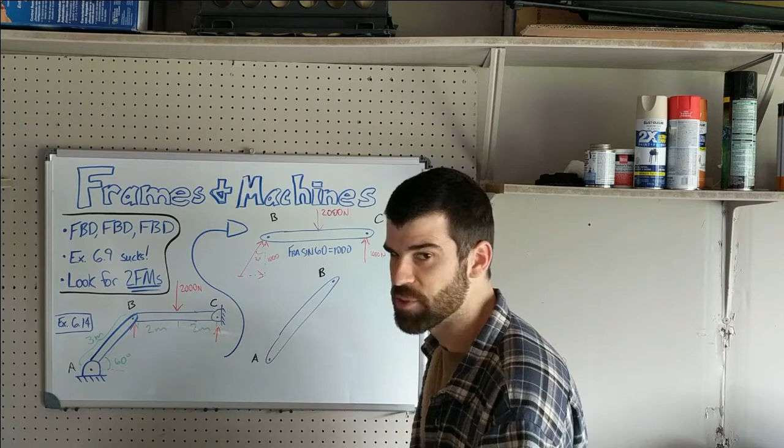And then that means this is a 30, 60, 90 triangle, I think. Yeah. All right, so basically this FBA... where do I write it? FBA is going to equal... that is 1,000 newtons, not 100. Sorry. Okay, FBA cosine 30, or FBA sine 60, whatever you want to say. We'll say FBA sine 60 is going to equal 1,000. And that gets you FBA is something like 1,150 something or other.

And then you're basically done, because now this X component is going to have a reaction here. So this is CY, CX, and here, if FBA is pushing on this, that means FBA is pushing on either side of it, so it is in compression, because those are pressing in on it. From the other side of things, this FBA right here is going to be equal and opposite, and you'll end up with your components here being your AX and your AY.

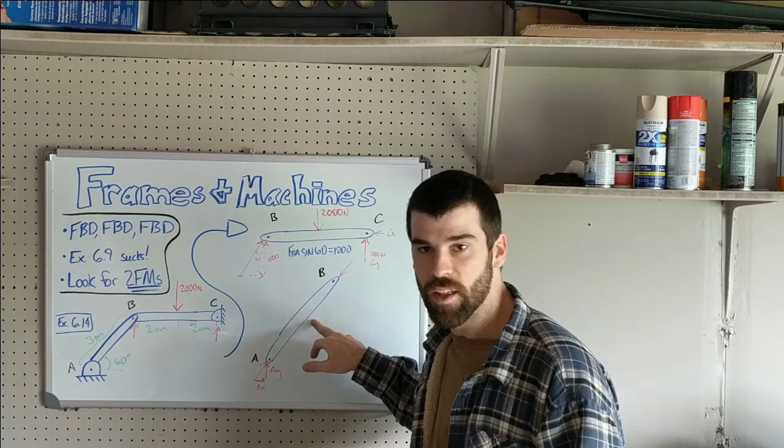So you can see how breaking it up and doing these multiple free body diagrams is going to illuminate the path forward, especially since you found the two-force member here, which simplified a lot of things. They show you in the book how it's several equations longer if you don't notice that this is a two-force member. So always look out for those. Don't trip about example 6.9, and we'll go work some more problems on the table.

All right, one final note that'll help you with your frames and machines part is that there's going to be a lot of pulley problems, and they tend to make things look pretty complicated with ropes serpentine through the problem, but really they're not so bad at all.

The main thing is that in a given rope, there's only going to be one tension, one tensile force. If they hang a mass on one end of a rope that's 75-pound force in that rope, then the entire rope is going to be carrying that 75 pounds of tension. It's kind of like a two-force member that bends. That's not right—anyway, we're not talking about bending moment.

Anyhow, so if you have this tension here, they might hang a mass here, and then it might be hooked into a little eyelet here. That's not a person. That tension is continuous throughout, and those two tensile forces are going to add up, and the reaction force up here, we'll call this Ry, is equal to 2T. It's that easy. You've got 2 T's going down, you've got Ry going up, equal to 2 T's.

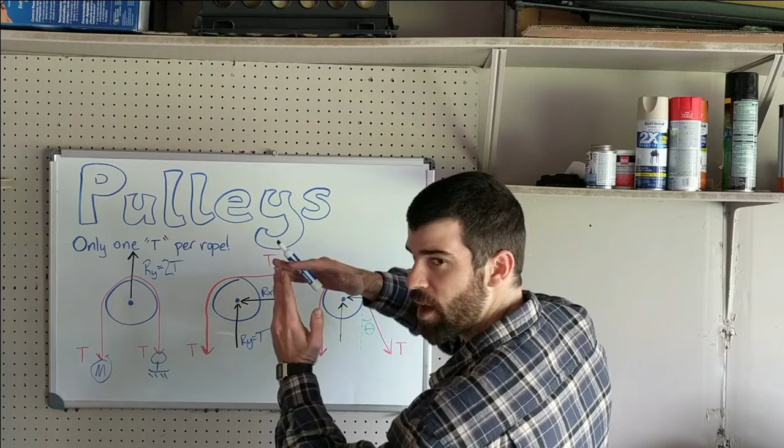Okay, and now finally they get a little cheeky, and they try to go somewhere in between—somewhere in between them both being down and then one being out there. So what they do is put a little theta in there, and you've got to know that once you've introduced any amount of that, it's like whenever you have a two-force member that's any amount off of the perfectly on the X or Y axis.

All right, free body diagrams. So this one wants us to draw free body diagrams for the frame, which is talking about this long rod, and the cylinder. So what we've got here is the cylinder that's working as a pulley because it's got this constant tension belt around it. Notably, that one's off at an oblique angle. And then we've got this mass, this weight that's yanking down on it over here.

All right, so if we're supposed to draw a free body diagram of the pulley and of the frame, what I'd like to do first is the pulley because it's simpler. There's fewer things going on with it, and that'll help us develop the next one.

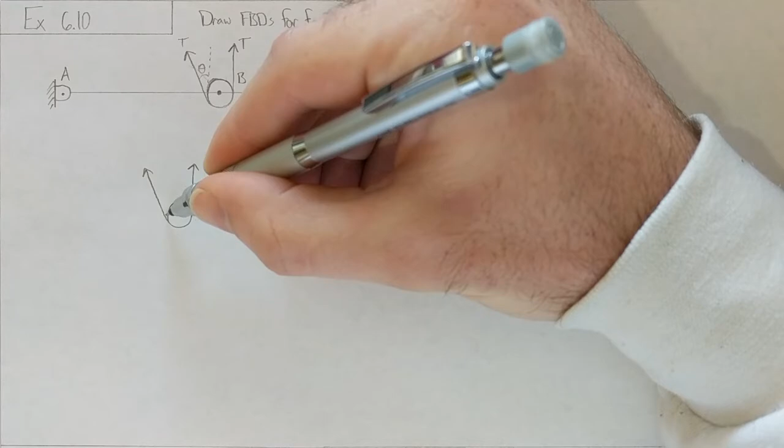Just draw our pulley right here. So we've got tension going this way, tension going that way, and we've got theta. They show that this is both T, but really in any pulley problem, even if they only gave you this T and didn't label that one, you'd know that this is also T.

Because you have constant tension throughout. So what's different between the two sides is that this one is going to have an X component in addition to the Y component. This side's T is all going into the Y direction, whereas this one has only a portion going in Y and some in X.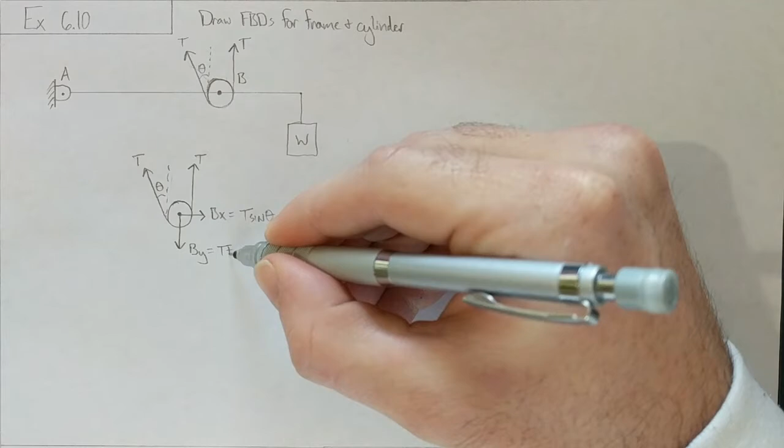But we're here to draw a free body diagram, which means we have to balance these out. So we know we're going to have this reaction force, call it By. And then we'll have this reaction force, call it Bx, because that pulley is yanking, that belt is yanking on the pulley in the negative X direction. If you did have to solve this, Bx would equal the sine component, T sine theta, and By would be T plus T cosine theta. This isn't part of the problem, but in case you wanted to know.

All right, and so then if we look at A, we've got... Okay, so now we can take what we learned from the pulley and look at the equal and opposite reactions it has on the frame right here. So By is yanking up from the frame's perspective.

And Bx tugging that way. That means from the frame it's going to be going the other way. And we'll just make that Bx. How convenient. Cool. What else do we have? We have weight pulling the frame down from the end. That's W.

So now we just have to balance that out with reaction forces at A. Bx is going that way, so we know we're going to have an Ax. And then this weight is talking about Y. We're going to have a negative AY here so that there's no moment.

And that's the whole problem. The one more free body diagram you could draw on this problem would be, so this is one, that's the pulley, it's another, that's the frame. If you wanted to draw the free body diagram of the weight, it would simply look like this. We can call this WY or something. I mean, it's just W, but it's equal and opposite that guy. And that's the whole free body diagram.

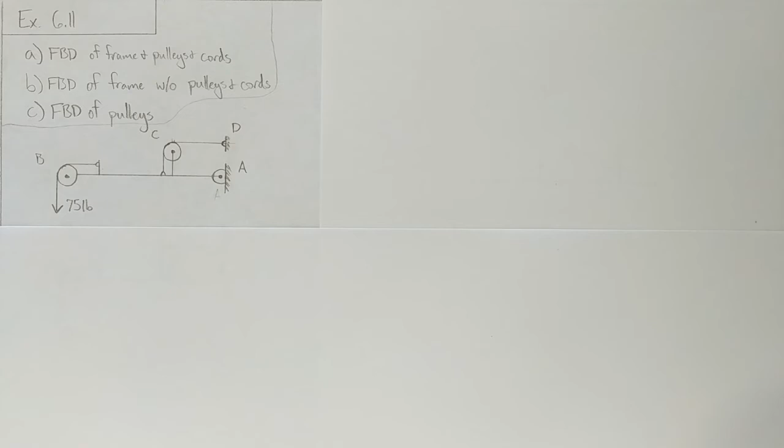All right, free body diagrams. We've got pulleys on a frame, and it wants 3 different free body diagrams. It asks for the frame and pulleys and cords, it asks for the frame without the pulleys and cords, and it asks for just the pulleys.

Now, it seems like that's asking for most of the information first, but it's really not, because this free body diagram of the frame and pulleys and cords is actually pretty simple. Because if you think about it, you're going to leave all of this stuff in, and the only things you're going to have to take out are your support reactions. So you just take out D and A, and you end up with something that looks like this.

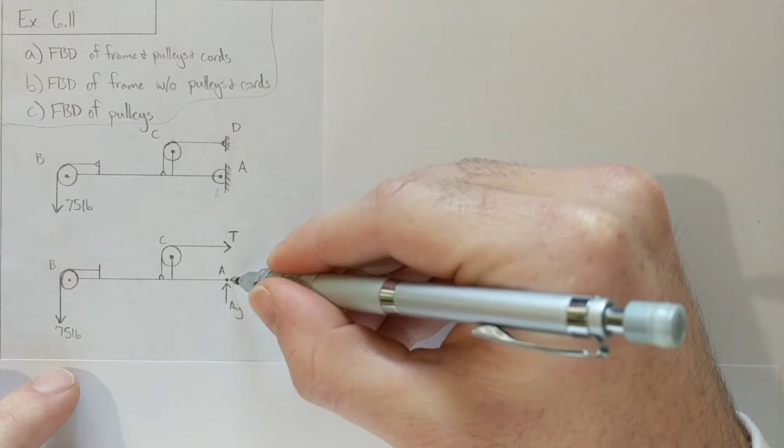And so to complete this free body diagram, all we have to do is replace D with a tension. It's a pulley, it's always going to be in tension. We'll just call that T, I guess. And then support reactions at A. So we've got 75 pounds yanking down, we're going to have to support that upwards with AY. We got tension in the positive X, so we're going to have AX in the negative X direction. All right, and it's that easy.

Now I'm actually going to skip B for now and go straight to C, because I feel like it's easier to do the pulleys and then go back and apply those to the whole frame like we did in the last problem. I just think it makes a little bit more sense to do it that way. So let's go ahead and draw our pulleys. We'll do B first.

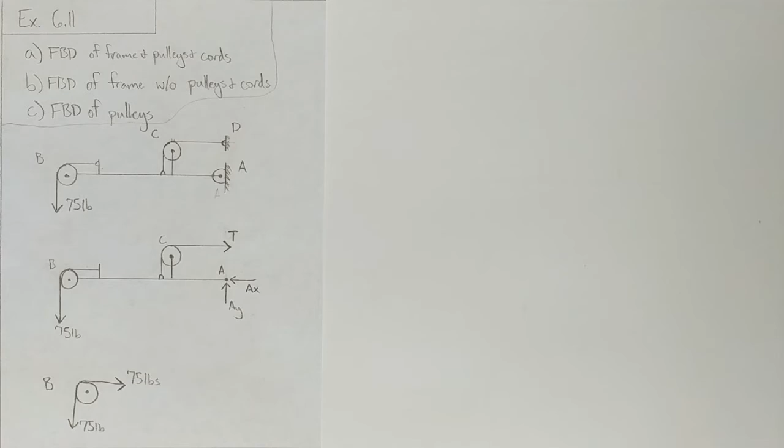All right, so it's got 75 pounds hanging down. And since tension is constant through these pulleys, you know that this one coming off here is also going to be 75 pounds in tension. And so we're going to have an X and a Y support reaction at the pin to counteract both of these. We'll call this one BY, and we'll call this one BX.

And now let's do C. It's going to look a whole lot alike. We know this is T, so this is T. And similarly to here, I'm going to draw these a little different, but it's the same thing. We've got CX, and we've got CY. Easy as that.

And now let's jump back to part B, put them all together on just this empty frame. All right, so let's start over here from B. We're just going to be seeing the opposite reactions that we saw at the pulley pins. So BX is going to be facing this way, BY is coming down here. Okay, this was our 75 pounds of tension.

And now, this 75 pounds was hanging off over here, but as far as the frame's concerned, that's all happening at the pin, so we don't worry about that down there. We've got our tension, and then we've got our CY and our CX, drawn like that. Again, we don't even have to worry about D here because D's not part of the frame, and all that tension here is being counteracted with CX and CY.

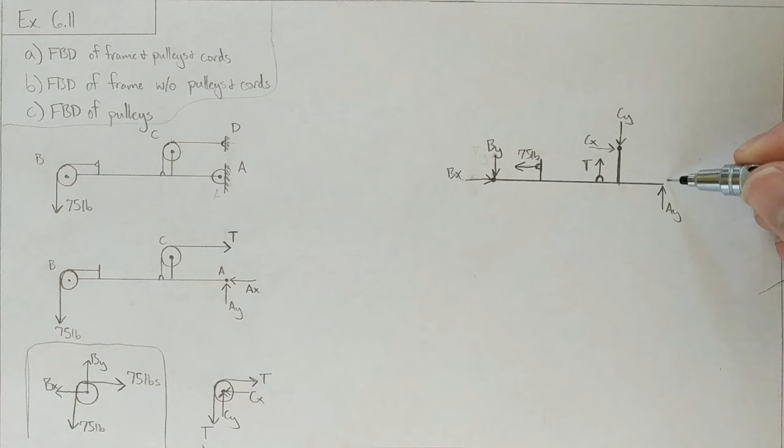So I went a little out of order here. Feel free to do that on your tests, I'm the one grading them. I just think it's easy to think about the pulleys before you go back to the machine and put in the reactions from the pulleys.

All right, so in example 6.17, it just wants us to determine the components of the reaction at its supports. So what supports do we have? We've got a roller at C, so that means we can only have a vertical support. B is not a support, that's just a little pin joint.

And then at A, here's a component that we haven't seen in a little while. Since we've mostly been dealing with truss problems, we've had a pin joint and a roller joint, but this is just anchored straight into the wall. So you know that this A is capable of having an X and a Y as well as a moment about it. So just keep that in mind.

All right, so we have these two different components here, and we're going to have to break them apart and look at the free body diagrams of them separately so that we can solve this problem. So I'm going to start over here because looking at this, you can see that it's going to be really simple to resolve, because this 4 kilonewtons per meter is directly down.

We know we can only have a directly vertical support reaction at C, which means that we're just going to have another vertical support reaction at B. Okay, so we could do this by saying, you know, by taking the moment about B or the moment about C.

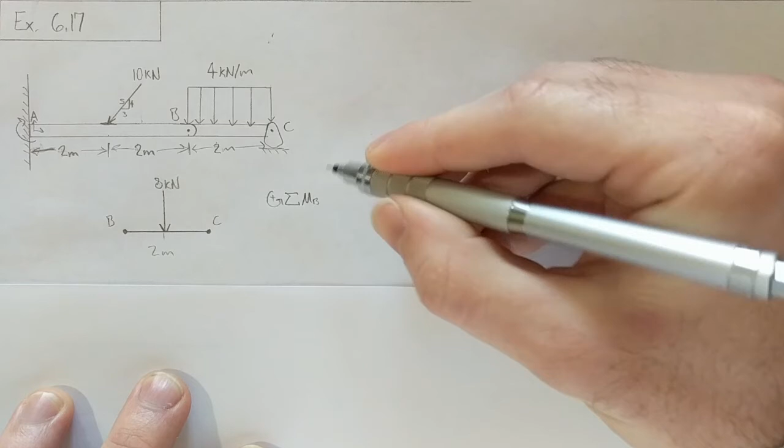And then you can say summation vertical Y is just going to be this minus 8 plus 4. Sorry, I'll go ahead and draw this in. CY equals 4 kilonewtons, plus BY equals 0, which gets us that BY is 4 kilonewtons.

Okay, so you can go through that, or in a situation like this, when you know that this is only vertical, and you see that this is halfway between, you can just see the symmetry of it and know that B and C are both going to be 4 kilonewton supports.

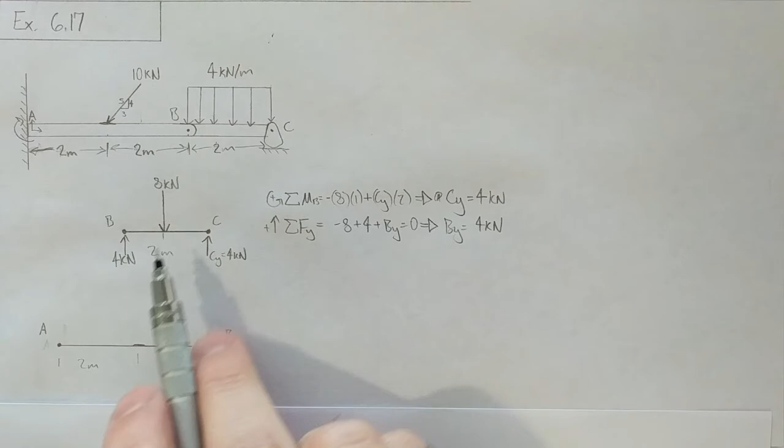Okay, and that's it for member BC. So now we can go ahead and move on to member AB and use what we know from here. So we've got 4 kilonewtons positive applied at B. That means that from BC's perspective, it's vertical. Then from AB's perspective, you've got equal and opposite, so here you've got 4 kilonewtons.

Okay, we've got our 10 kilonewtons applied here as a 3, 4, 5 triangle with 3, 4, 5, and it's in this direction. So we're going to have, this is going to be 4/5 of 10.

So that's 8 kilonewtons, okay? And then we're going to have this horizontal one, which is going to be 3/5 of 10, which is 6 kilonewtons. All right, cool.

And so now we can figure out what the support reactions are going to be at A the way we would always do it. We can go ahead and sum up our X's and Y's. We've got -4, -8, plus AY equals 0. AY is 12 kilonewtons.

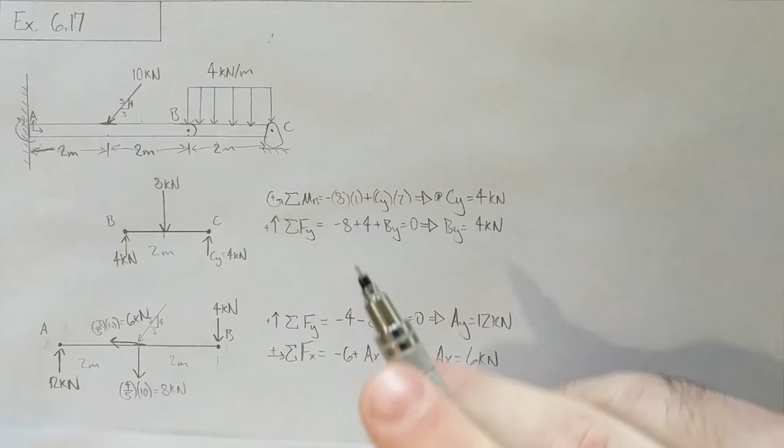Okay, and now last but certainly not least, got to remember that there can be a moment about A. So let's take a look at what we got. Looks like all the moment is trying to turn it clockwise, so we're going to have a counterclockwise moment at A. Let me go ahead and draw in AX real quick. 6K.

All right, so summing our moment about A. We have -8 times 2 minus 4 times 4, plus our MA equals 0. That's 16, that's 16. So that gets us MA equals 32 kilonewton meters.

And so that's going to be in the counterclockwise direction. So just make sure in this frames and machines, they're bringing back other support reactions that we hadn't seen for the rest of the chapter. So just be careful that you don't forget about those.

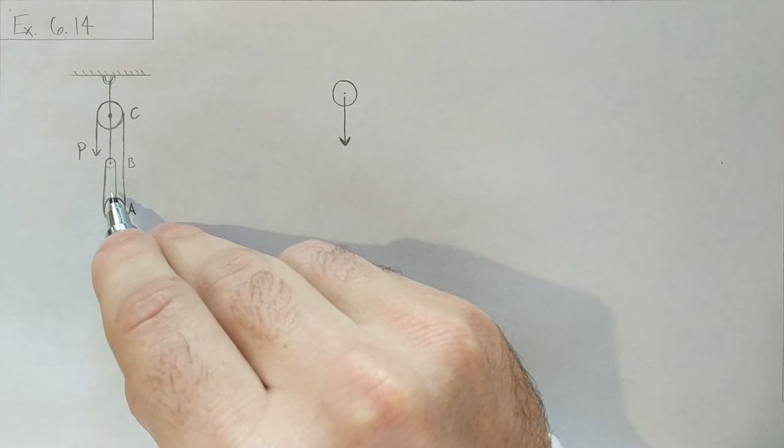So, like we've been doing, we're going to draw some free body diagrams. Let's start down here at A, where we have this known mass. It's our only known in the problem right now. So let's draw pulley A. We have 600 newtons, like this. And then you can see that all three of these are the rope, or the cord, or whatever you want to call it. So this, and this, and this are all P. That's P, P, and P. And this is 600 newtons.

All right, and so already we can figure out P just from pulley A, because we have, I guess this is summation in Y. We have 3P equals 600 newtons. So we have P equals 200 newtons.

Okay, moving right along. I'll label that. That was A. Let's take a look at pulley B. This little fella has some tension going up to pulley C. It has P and P from the cables.

Oh no, I'm running out of lead. Okay, and that does it for this guy, which means that we can figure out T because we know P. So summing in Y again, we're going to say T equals 2P. Nifty, T is 2P, 2 times 200 is 400 newtons.

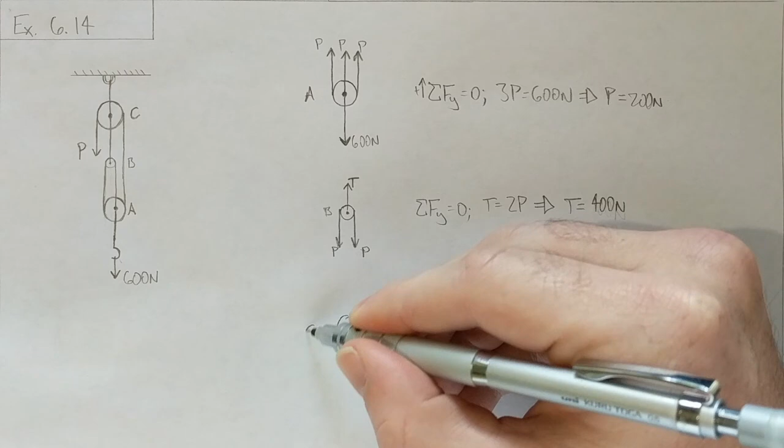Okay, finally, we've got pulley C. That was B, this is pulley C. We have P. We have P. We have T. And we have, we'll just call that R because that's what the book does, but this is what's connecting it to the ceiling. So, summing in Y, R equals 2P plus T, which equals 800 newtons.

And that's it. These are all the free body diagrams. That's all the unknowns. Pulleys, have a sigh of relief when you see a pulley on a test, because they really aren't too bad.